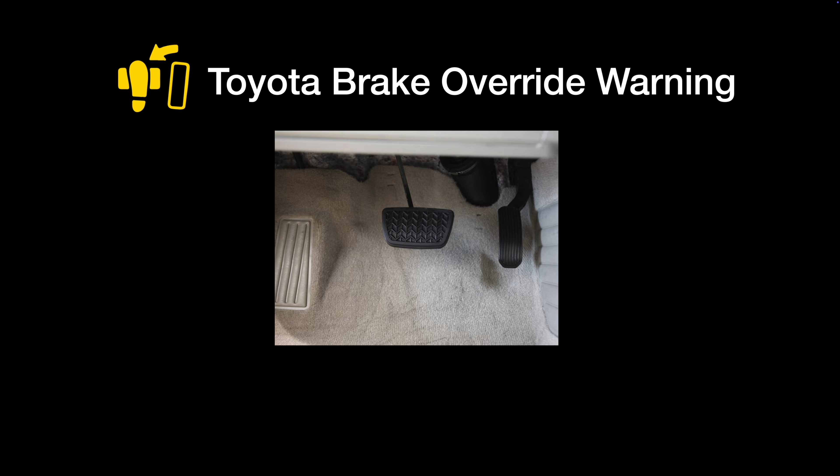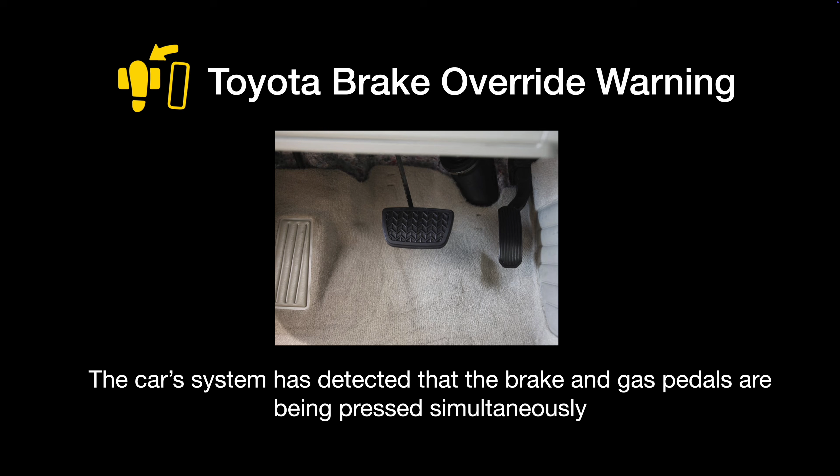This is the brake override warning light on your Toyota dashboard. It means that the car system has detected that the brake and the gas pedal are being pressed at the same time. This is a safety feature to reduce engine power to prevent unintended acceleration and help keep you safe. Now, what are the common causes of this warning?

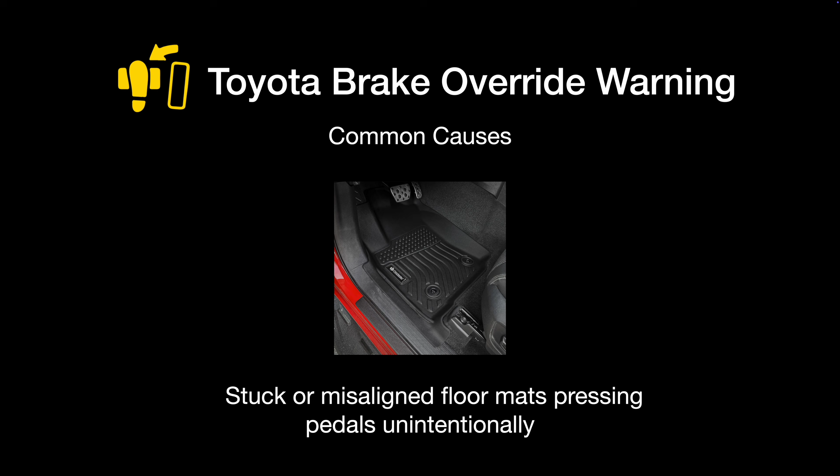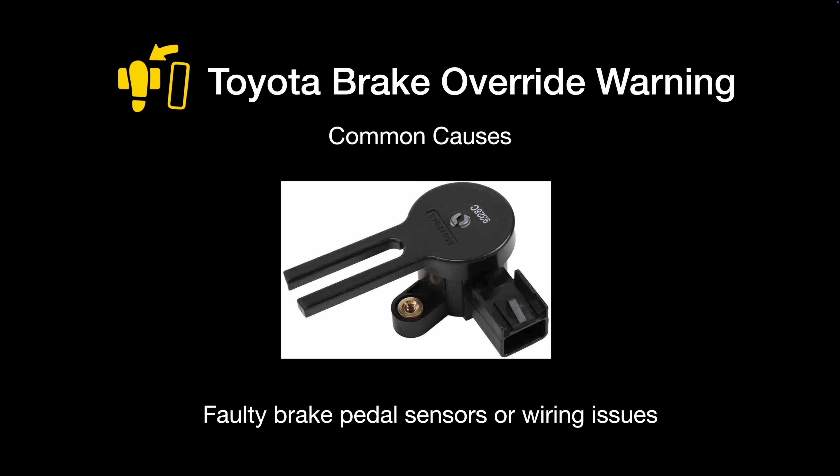Well, first of all, it's stuck or misaligned floor mats pressing the pedals without you even knowing. Second, it could be faulty brake pedal sensors or wiring issues. Obviously, you may not press both of those pedals at the same time, so there's definitely something going on there. Finally, this could also happen if you have made some aftermarket modification to your Toyota, including taillights.

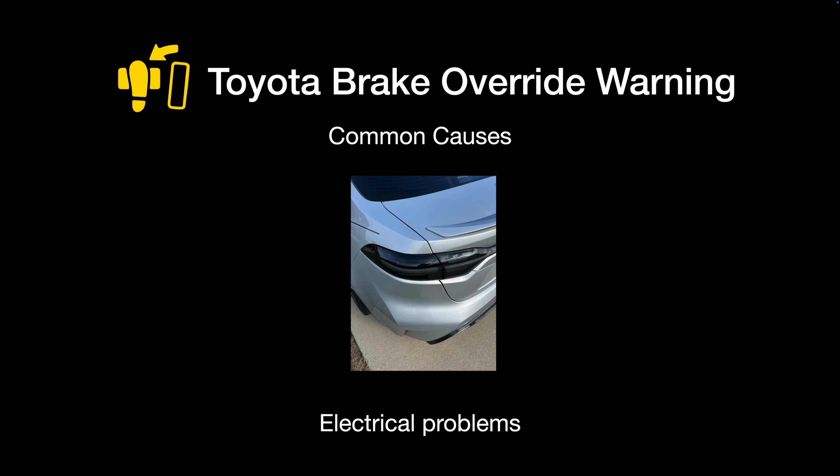So let's talk about those aftermarket taillights and the brake override issues. Many Toyota owners on the internet have reported this warning appeared after installing aftermarket LED taillights, especially on Tacomas.

The problem often comes from incorrect wiring or missing bulbs in the new taillight assembly, faulty or improperly installed resistors that cause short circuits, and blown fuses, particularly the 10 amp stop fuse, due to electrical issues introduced by the aftermarket parts. These problems can trigger the brake override warning and sometimes other warnings like check charging system, which will prevent your car from starting.

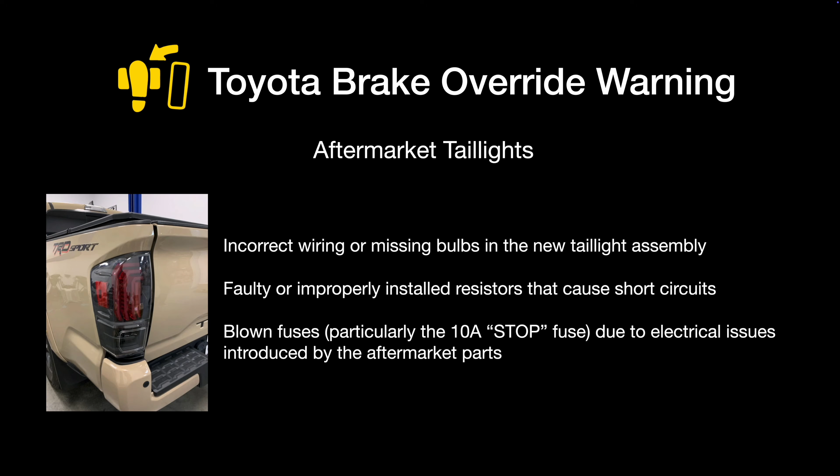Now, what do you need to do if you see this warning light? Well, first check your floor mats to make sure they are not interfering with the pedals. If this is fine, inspect the brake pedal sensor and wiring for damage or disconnections.

Then, if you have recently installed any aftermarket taillights, headlights, or anything else with an electrical component, verify that all the bulbs and resistors are correctly installed and the wiring is secured. Check for any blown fuses in the fuse box. Usually you have 2 fuse boxes in your Toyota, and replace them if needed.

If the problem continues, try reinstalling the original taillights or original part that you replaced with an aftermarket one to see if the warning clears. If you still cannot clear this error, I suggest you check with your dealership or any other mechanic that has a scan tool that will be able to see exactly what's the root cause of this problem.